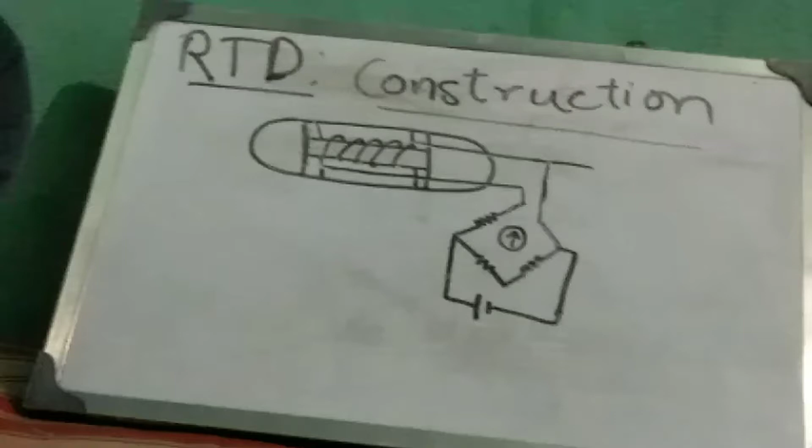In the previous video we saw what is resistance temperature detector or resistance thermometer. Now we'll know about its construction, its basic construction. So it basically consists of a non-conductive cylinder or a strip, let's say a strip, generally of mica, okay,

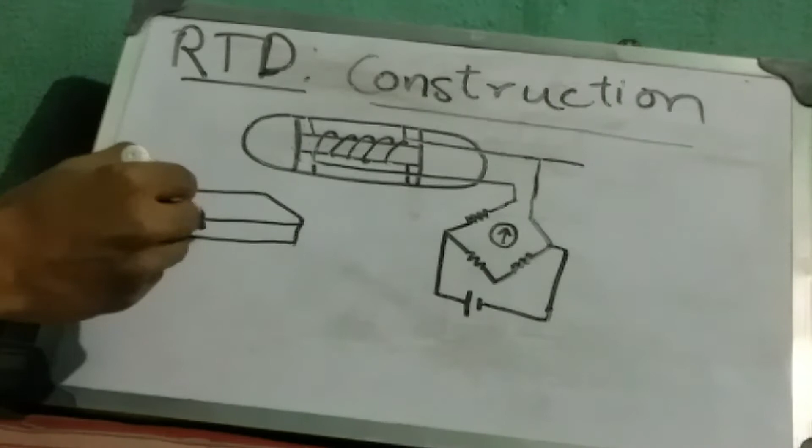on which the metal wire, which is called the temperature sensor, that metal wire is wound, okay. The temperature, this wire is wound, okay. So this can be a cylinder also, basically a cylinder of mica around which the wire is wound, okay.

Now this full system, the wire and the mica strip or the mica cylinder, this system is enclosed in a protective tube of pyrex glass, or we can say it can be stainless steel in case of industries. For laboratory, means in lab or such small things, we use pyrex glass, or nickel or stainless steel are used in industries.

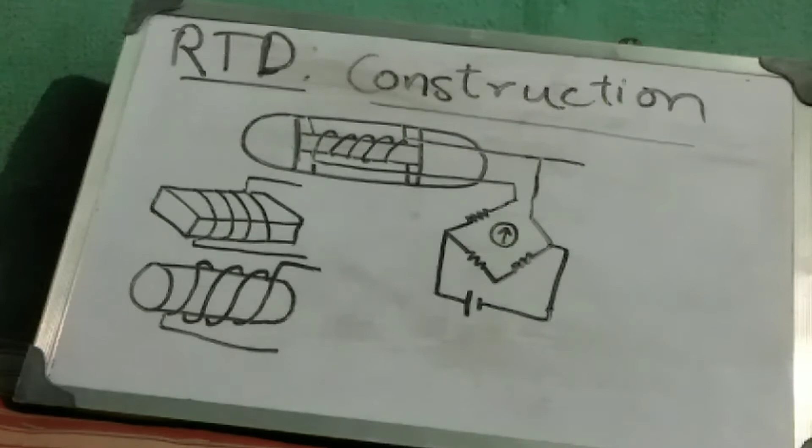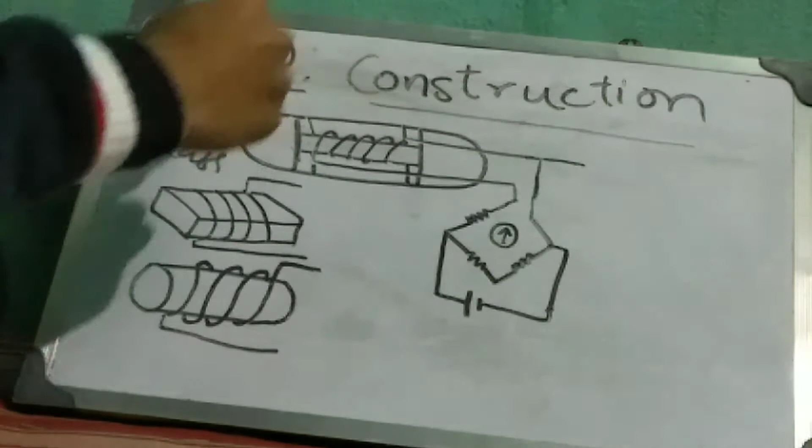So this glass, okay, pyrex glass coating. Why this protective tube is given? It is enclosed in this protective tube to avoid the corrosion of resistive element, okay, to protect the wire or the system from corrosion. It is given protection of a tube which is generally pyrex glass in case of lab, or it can be stainless steel in industries, okay. So this was the basic construction.

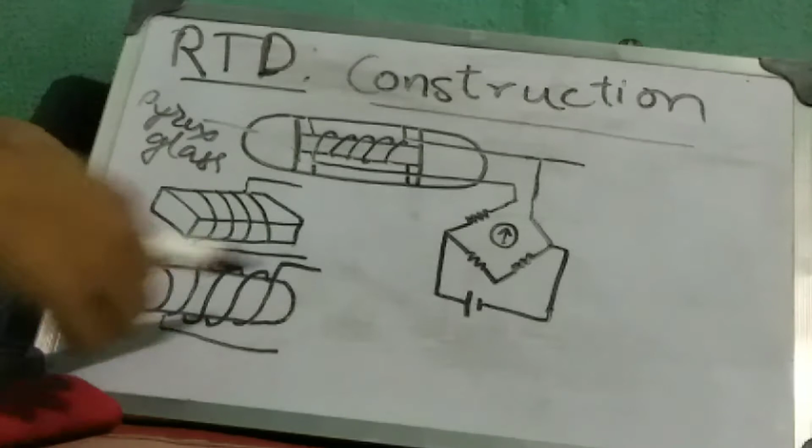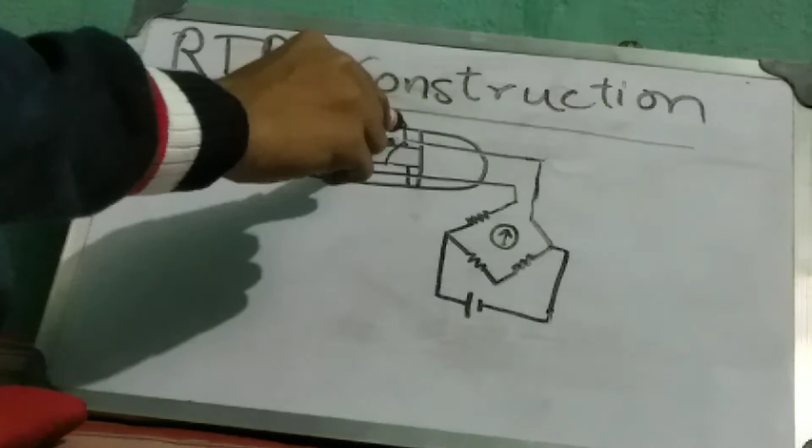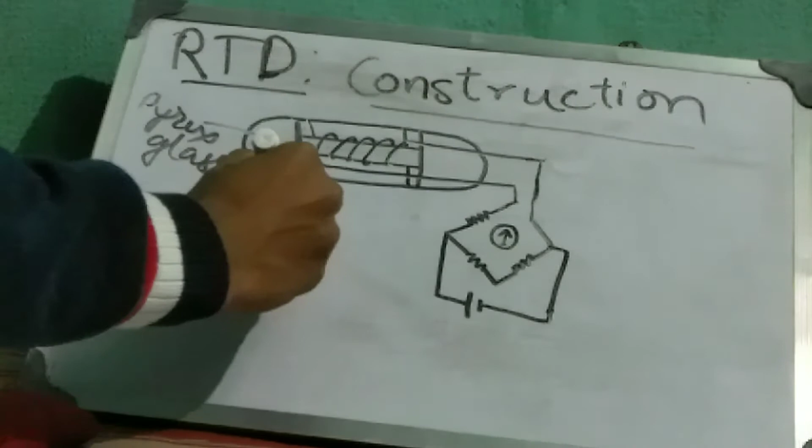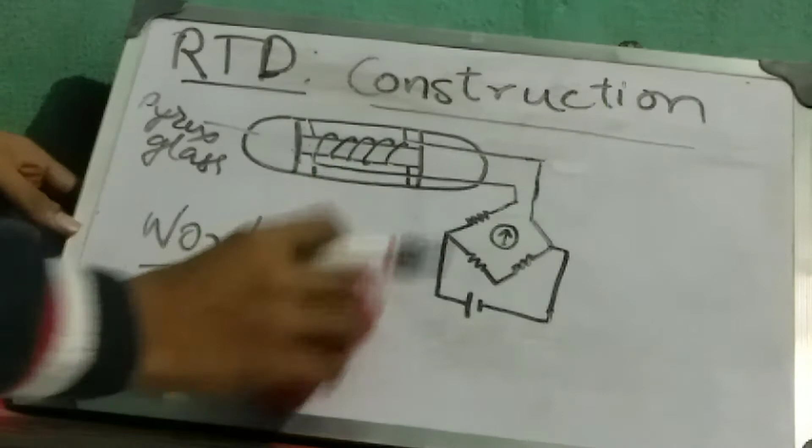Now the ends of the wires are taken and connected to a Wheatstone bridge, okay. We know this Wheatstone bridge, and the resistance is measured here, okay. Now this was the basic construction. Now we will discuss about the working, the basic working, how it works, okay. So this was the basic construction.

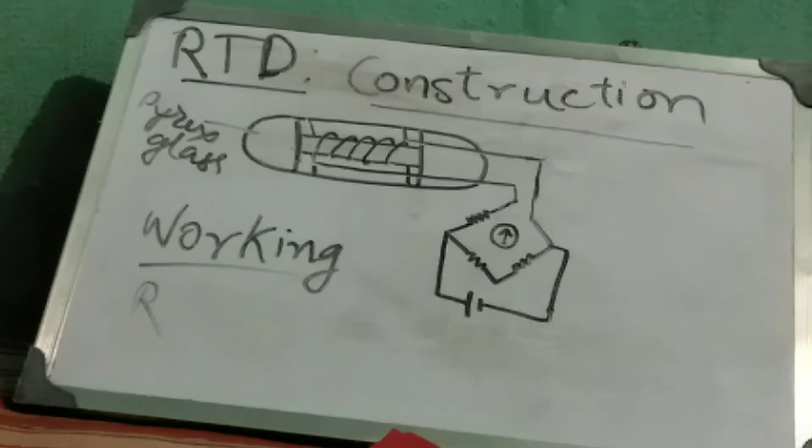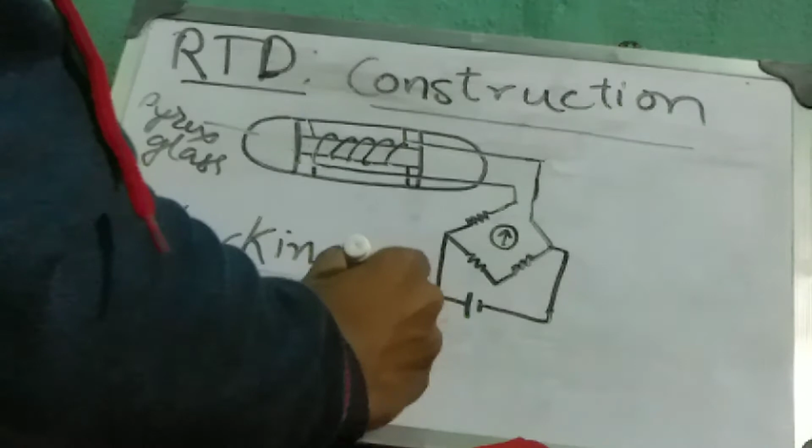Now for working, we previously discussed that the formula is RT equals to R reference into 1 plus alpha into del T, okay. So we discussed what is RT. RT is the resistance at a given temperature T, okay. R reference is the resistance at the reference temperature, okay.

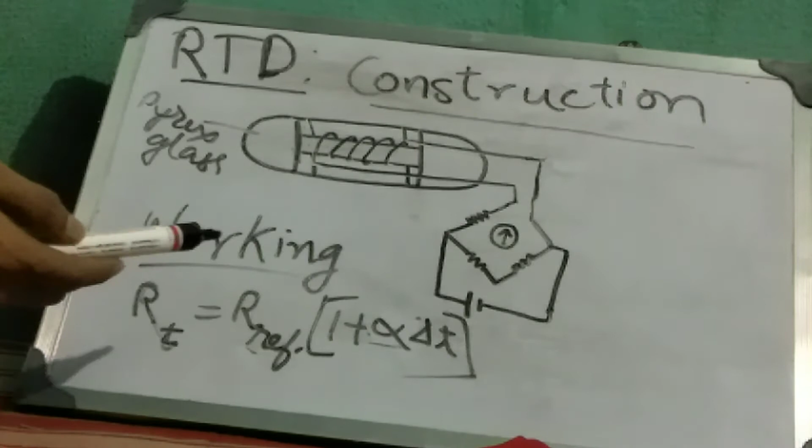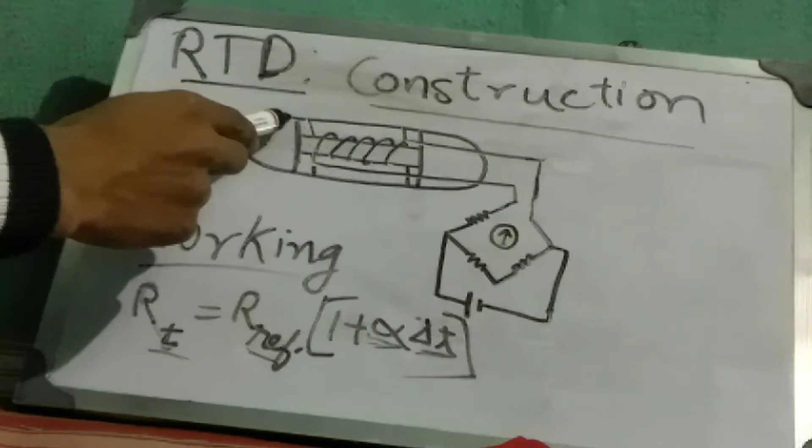We can take 0 degree Celsius as the reference temperature, and this alpha is the coefficient of the wire. If we take platinum, then it will be the temperature coefficient of the resistance. It will be known to us, and this del T is the difference between the reference temperature and the temperature to be measured. Okay, so we put this tube in the place where temperature is to be measured.

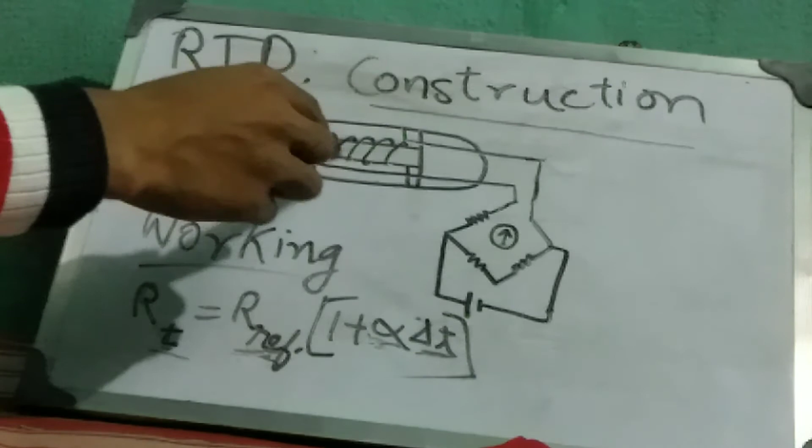Then what do we know? We first know the temperature coefficient of the resistance, that is alpha. Now we know the reference resistance at the reference temperature, that is R ref, R reference. That we know because if you take platinum, what is its resistance at 0 degree Celsius, we know it. Then we want the temperature difference between the reference temperature and the given temperature, what we have to measure.

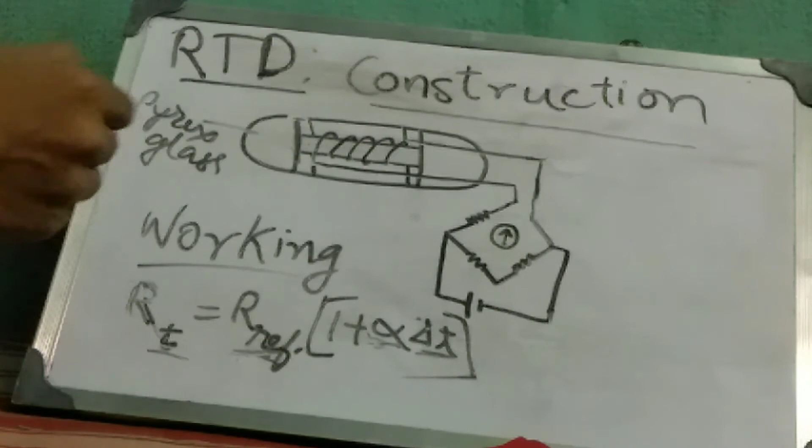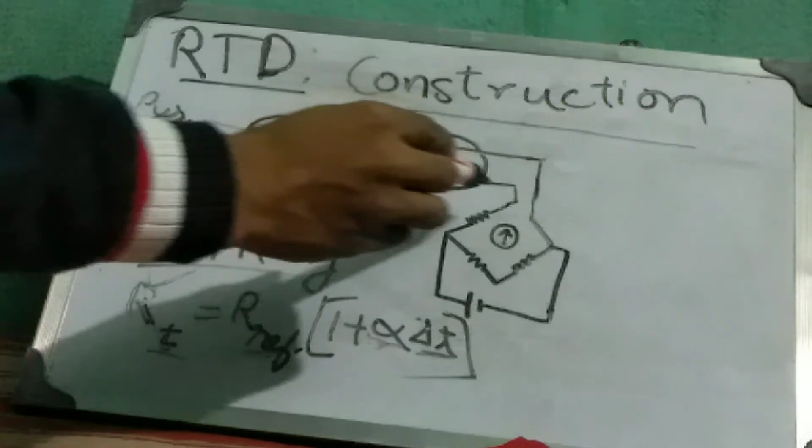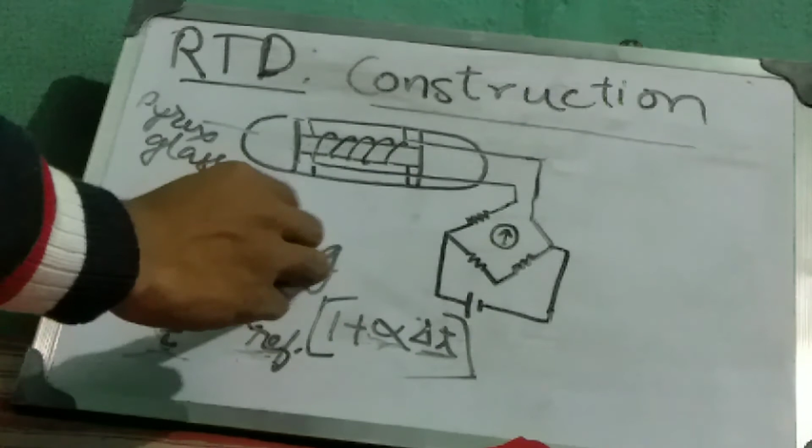We measure the resistance RT. We measured the resistance RT and the resistance at R reference is known. By help of this, we will get the reading at the temperature to be measured. The resistance is known, we know the resistance at the reference temperature, we know the coefficient of resistance, so we will get del T. From this equation, we know these three things, so we can get this del T.

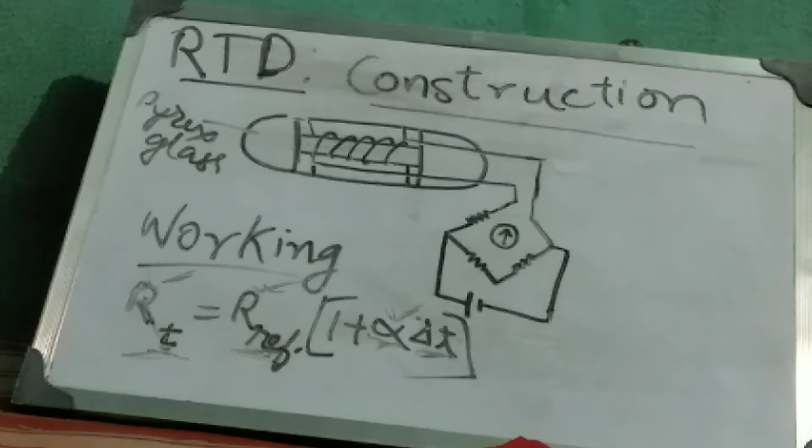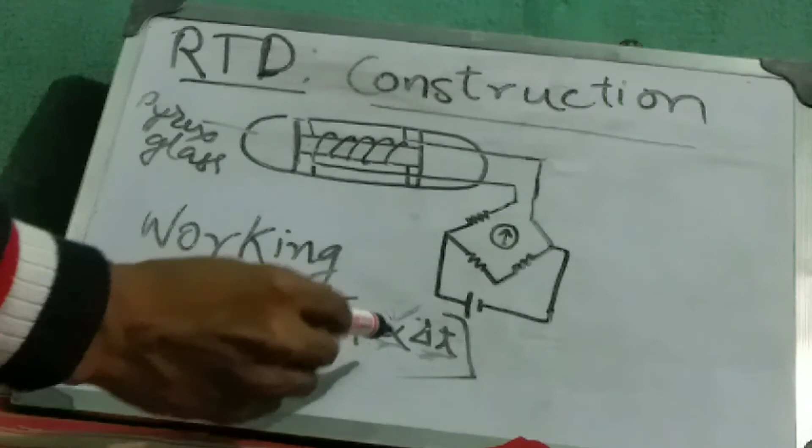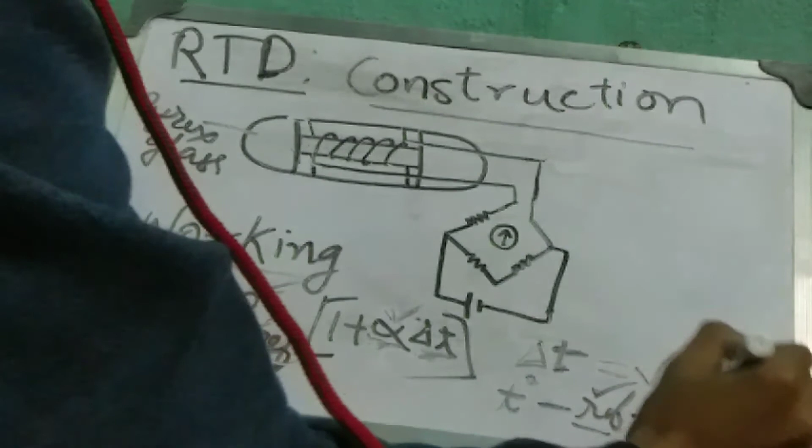What is this del T? Nothing but the temperature difference between the temperature to be measured and the reference temperature. So from this we will be getting del T. The reference temperature we know, del T we found from the equation, so we can take out the temperature to be measured.